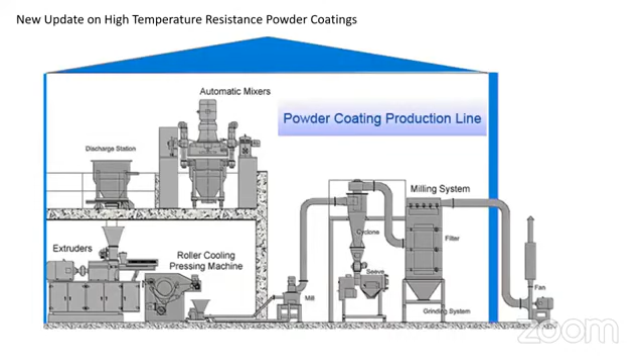Thanks, let me take you through my presentation. Are you able to see my screen? Needless to explain how powder coating is manufactured, because I thought some applicators are likely to join, so that's why I just put this chart. This is how powder coating is manufactured. We make appropriate formulations and mix it in the mixer, then transfer this product into a machine called an extruder, where powder is compounded at a semi-melting stage. Then it passes through a chilling roller, then we make it into small flakes, then we mill it to the appropriate particle size. So if you ask me, only 50% of the whole powder coating process is completed at the manufacturer level.

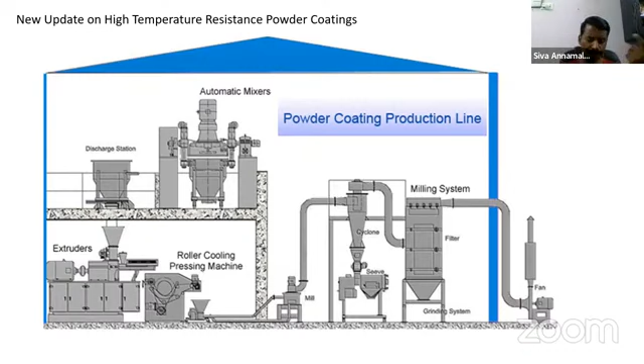So we supply only powder to customers. Then the remaining 50% of the process, like melting, curing, cross linking, happens at the customer line. So both are equally important. This is how powder coating is manufactured.

Now I am going to talk about one new topic which most of the people know, or maybe may not be knowing in depth - high temperature resistance powder coating. Some people call it HR powder, heat resistance powder. Some people call it high temperature resistance, that's called HT powder. Most of the HT requirements are based on silicone resins. For example, powder coating is established well in mufflers, silencers, some barbecue equipment, even in some utensils which are directly exposed to high heat. Some automotive parts, some ACE segments - ACE meaning agricultural construction equipment like tractors, JCB kind of machines.

Some products are where this heat resistance powder coating is in high demand. Most of us know that these heat resistant powders are produced with the help of silicone resins. But the thing is, silicone resins are of two types: phenyl type and methyl type.

Based on their chemical nature, you can get temperature resistance of maybe 400, 500, or 600 degrees Celsius. This is up to this, most of us know about it. But the second part is that the cost of these resins is very expensive, a minimum of 1,500 to 2,000 rupees per kg.

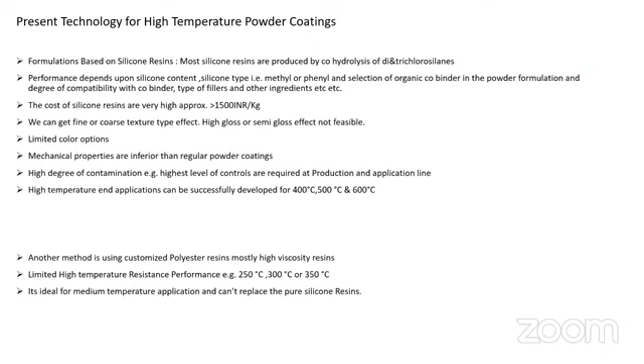And fourth, limited color options. You cannot achieve whatever kind of metallic effects or finishes you want. Also, your high temperature performance depends not only on the silicone resin, but also on the type of filler you incorporate, and the type of special effect pigments you incorporate. So it's a combination of all these factors that gives you a final powder.

So only powder alone cannot give you corrosion protection. You must have aluminum metallizing. This is the current technology.

Next, some people take the silicone resin. There are two types of silicone resins available, as I told you: one is methyl type, another is phenyl type. One type is compatible with other organic co-binders like epoxy or polyester, meaning you can blend your polyester system with silicone resin.

You can get some intermediate kind of performance, so that you can improve your mechanical properties. This is one option. Whereas the other type is not compatible with any other organic co-binder, meaning in that formula you cannot add epoxy, polyester, or any curing agents. But your heat resistant performance would be excellent, while your mechanical property and all other remaining properties are highly subjective.

So some customers, what they do is use polyester. They don't want this powder for barbecue equipment or for silencers. So what they do is choose a purely polyester resin that has high viscosity. There are customized polyester resins available with viscosity of 10,000, and even up to 20,000.

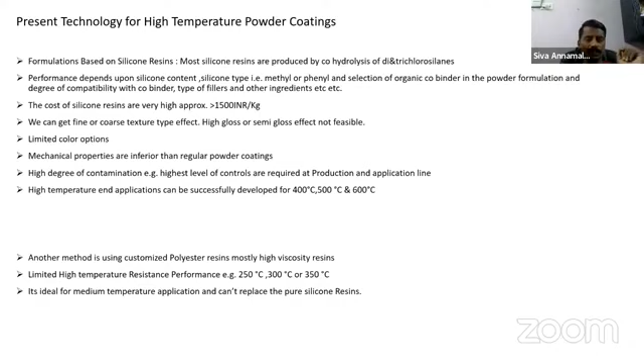This is called silicone modified polyester. So it is not purely polyester, and it is not purely a silicone resin. It is called silicone modified polyester. When you synthesize polyester, when you manufacture polyester, specially customized silicone monomers are infused at the time of manufacturing, in the polyester chain. It is not like a physical blend of two resins - it is basically special silicone monomers infused in polyester resins.

The approximate ratio could vary from 35 to 50%. It means finally you get a polyester, but that polyester consists of silicone monomers to the tune of 35 to 50%. What is the advantage?

You can get even high gloss finish, above 80 gloss. High gloss finishes are possible - this is not possible in conventional silicone resins. Second, you can get semi-glossy formulations - 50 gloss, 60 gloss, 70 gloss possible. Third, the cost is approximately 40 to 50% lower than your existing silicone resins. Existing silicone resin, if you import small quantity, may cost you 2,000 rupees per kilo. So the cost of this product is comparatively lower, 40 to 50% compared to pure silicone resins.

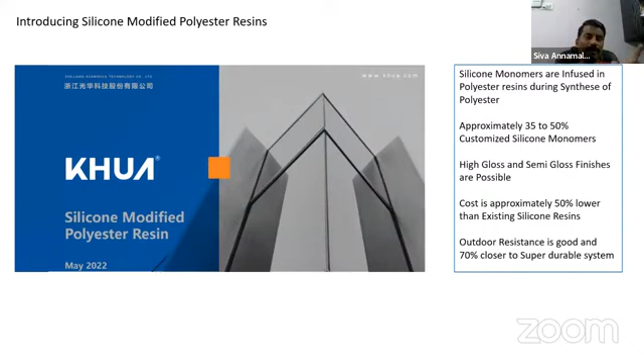And most important, this can be used for outdoor applications. With normal silicone resin, nobody will look at the weathering property because the shade itself is like a dead matte kind of texture product. Whereas this one can give outdoor performance very close to super durable. I am not saying it is as good as super durable - it's better than standard PE but very close to super durable. So 70% of super durable performance you can get with this polyester. Very few people have developed this. This product is called SMP, silicone modified polyester resin.

So what is special? This is basically the brand what I am representing - it's not about the brand, you can choose any brand as you wish. The brand we work with has the grade called GH9000. This is basically a hydroxylated resin, which means the curing agent would be IPDI, isophorone diisocyanate.

As I mentioned, silicone resin has no pure curing agent that can react with it, because your heat resistant performance comes purely from the reaction between silicone and oxygen bond - the Si-O bond. Si means silicone, O means oxygen. If the bonding between Si and O is very strong, your heat resistant performance is very strong. Somewhere it is Si-OH, so that's why we use IPDI as a curing agent. The polyester is basically PU type polyester, hydroxylated polyester, but infused with silicone monomers. The grade name is GH9000.

So we picked up this resin. We developed it last year, but commercialized it last May, in technical collaboration with one European company. So this product we compared with the existing high viscous polyester resin currently used in the industry for high temperature performance, to the tune of 300 degrees Celsius. So GH9000 is basically silicone modified polyester.

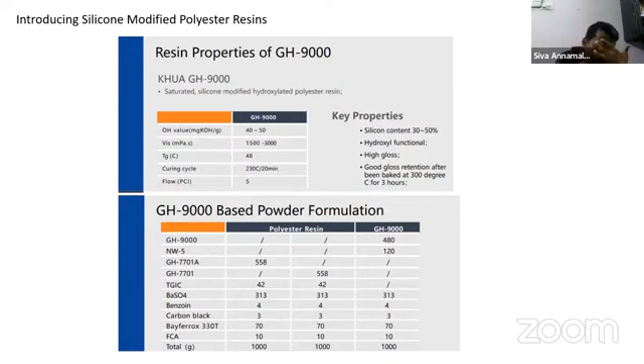This is the performance we tested at 300 degrees Celsius, for both grades. We never take silicone resin for comparisons - we take only the polyester resin for comparison, because silicone and polyester are different chemistry, so we do not include silicone in the comparison.

We expose the normal polyester, which has viscosity about 10,000 to 20,000. The gloss retention is very poor, whereas the silicone modified polyester resin shows extremely good gloss retention even after 3 hours of exposure at 300 degrees Celsius.

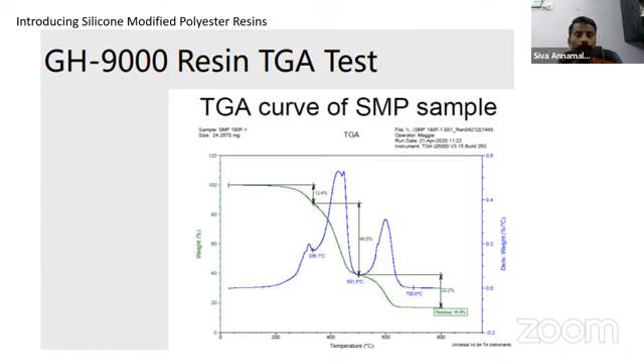Now we compare how the regular polyester system behaves - that is the high viscous polyester. If you see its green line, from 200 degrees it straight away comes down. It means at 300, 400 degrees, it's completely decomposed, and all the products are fully decomposed, with the residue coming around 42%.

This indicates the performance of silicone modified polyester is extremely good compared to your conventional polyester system. So this can even replace silicone resin in selective applications.

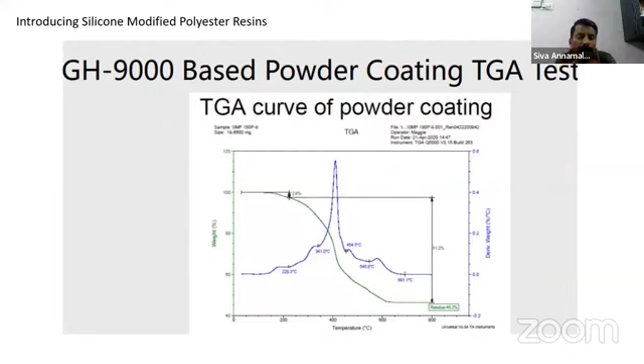So what we do is, if your sample performs well at 300 degrees even for 3 hours, then we check it at 350 degrees Celsius. At 350 degrees, even after 2 hours of continuous exposure, the formulation and resin performance would be excellent. This is about my first topic on silicone modified polyester, which is new to the industry.

Now if you compare the heat resistance, let's look at the second column. The initial gloss for this one is 88, whereas the regular high viscous polyester has an initial gloss of 94.7.

If you expose it to 300 degrees for just 1 hour, the gloss goes down - some products go to 67, some straight away drop to 10 gloss. After 2 hours, the coating is completely decomposed, and after 3 hours, the gloss goes down to 3.

Whereas here, the gloss from 88.8 comes down only gradually - the percentage of gloss retention is above 90% even after 3 hours of continuous exposure, in a glossy finish. What is most important is that it is a glossy finish, not like a silicone resin textured finish. Even in a glossy finish, you get excellent gloss retention after longer exposure.

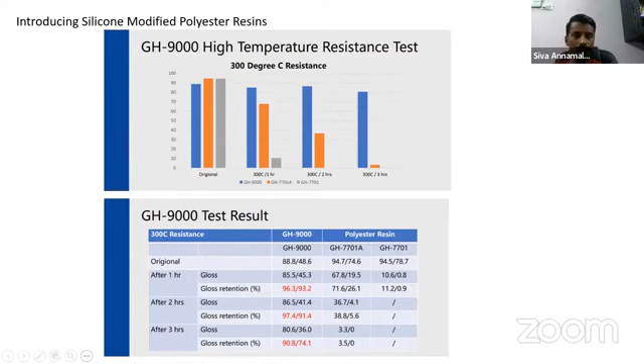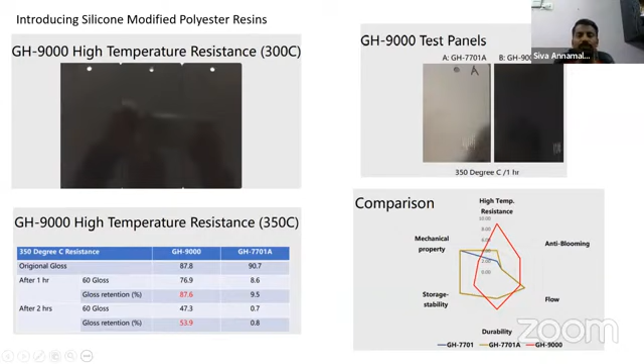So this is basically one new product which I would like to update, and I think only 2 companies have this product, you can check it out. We have it, and one more company is also having a similar product. Of course I can share all the details separately. If you want the presentations, I will share with you separately. So this is about silicone modified polyester, one new product.

Second one, I'll take you through the metallic powder coatings. Everyone knows this, sorry to interrupt.

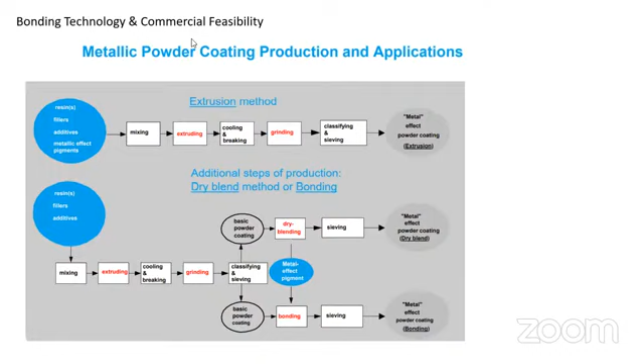Can you hear my voice, Kuldeep sir? Yes sir, it's audible, you may please start with your presentation. Yeah, it's clear, sure, fine.

So second one is metallic powder coating. We all know how powder coating is manufactured. Once we manufacture powder, to get metallic effect, there are three methods currently available. One is the extrusion grade product. It means you make powder coating, premixing, extrusion, milling. During premixing you add certain metallic pigments into the premixer, then you extrude it, then you mill it, and you supply. This is called extrudable grade metallic powder coating.

What is the advantage? You need not add anything after completing your production, so your time is saved. Any color you want to fix, you can fix at the premix stage. But what is the negative aspect of this process? Actually your metallic effect or metallic brilliance, you get a dull effect. Your metallic or luster effect goes away when the metallic pigment is subjected to high shear in the extruders. So this is a disadvantage.

The second one is called dry blending method. It means you produce powder separately and mix metallic pigment, preferably aluminum, into a blender, and blend homogeneously, then supply. This is a good method, you will get very bright metallic effects, but the disadvantage is that the specific gravity, the density of metallic pigments, is much higher than the density of powder coating, almost 2 to 3 times.

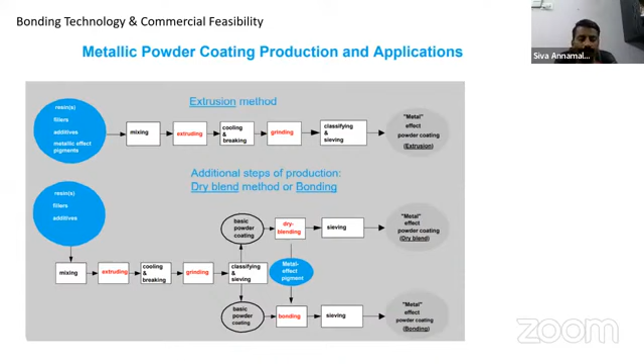So this is the spraying process. When your powder is traveling along with your air, if it travels uniformly, then you will get a uniform finish. But there are three forces acting on each powder particle. One is gravity force - if the powder is heavy, it has more weight and will fall down. Second is electric force. Third is the aerodynamic force. Fine particles will be collected in your cyclone. So we all know this.

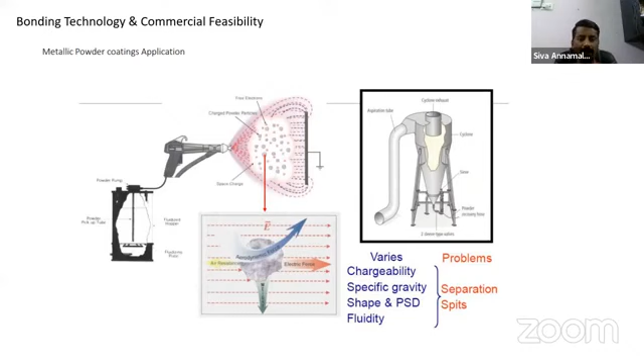But if you take a dry blended product and spray it, your recovery powder and your virgin powder may not have the same color. So we face a lot of challenges in the application line whenever metallic pigments are used. So this is basically the difference between dry blending and bonding.

Before going into more detail about bonding, let me recap the three methods. Extrusion method: the metallic effect goes away if aluminum pigment is extruded, because due to high shear in the extruder, metallic brilliance goes away. Second, there's a high possibility of explosion when you mill the powder, since if too much metal pigment is added to the hammer mill, there are good chances of explosion.

In dry blend, excellent metallic effect is possible, but you cannot add more dosage of metallic pigment. That's number one. Second, metallic separation - powder and metallic separation is obvious.

So bonding means, as I told you, physically the pigments and aluminum pigments and base powders are physically attached. But in bonding, there are things most of us may not know. So I'm going to give a few minutes of information about points most of us may not be aware of.

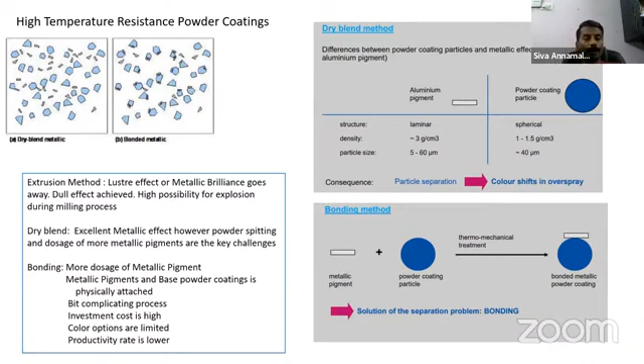Fifth one, as I told you, productivity. Productivity rate is very, very slow compared to your conventional dry blending method. For example, this is a method.

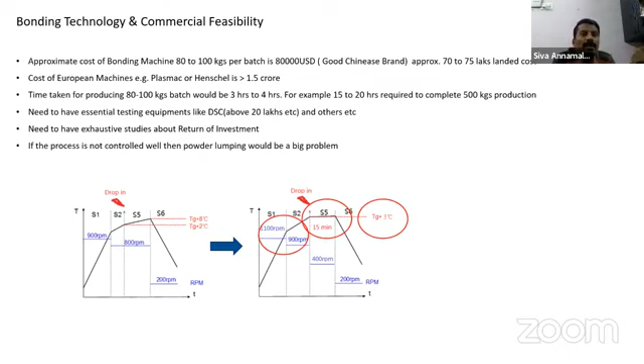It's one of the good methods, but looking at the cost and the process, you need to think twice whether you really need to invest or not. So this is an input because I repeatedly get so many calls asking, shall I go ahead for bonding?

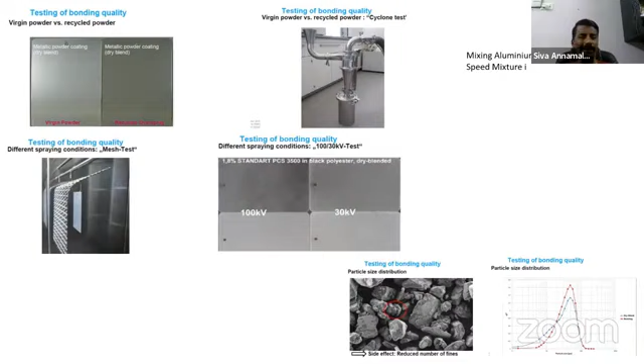The third one we all know is hydroxyl alkylamide. We simply call it primide. Primide means everyone knows, but unfortunately in India most people are not happy with primide-based formulations, or they are not successfully able to develop a product. So there are many complaints. Before going into those complaints and how to solve them, what are the formulation solutions?

I want to give first a comparison. There are only two key curing agents for polyester finish. One is TGIC, another one is called hydroxyl alkylamide, commercial name primide. Primide is the brand of EMS-Chemie, so the chemistry name is HAA, hydroxyl alkylamide. These two are the most commonly used curing agents in the powder coating industry. Other than that, polyurethane hardener is there, PT910 equivalent hardener, Powderlink equivalent hardener, but the consumption or usage is very, very limited, so we ignore it.

So let's compare TGIC and HAA. What is the good one? TGIC is the established curing agent in the industry, but it is carcinogenic. It is classified as a CMR substance. You must label it when you want to export the powder coating to any European country, even to the US. Labeling is must, it means skull and bone label must be there. Second, the cost of TGIC is always much higher, to the point maybe sometimes 3 times higher than your existing primide formulations. That is the second one.

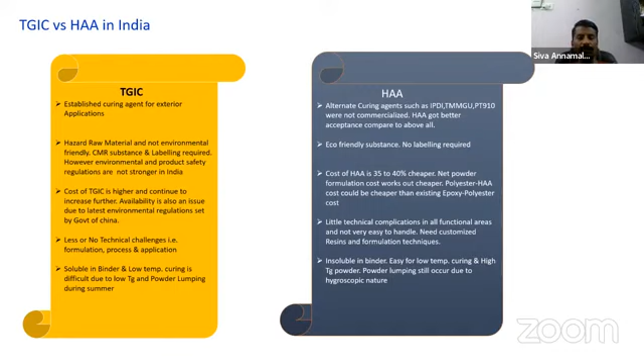But if you look at the consumption in India, it is quite low. I visited many European countries and sites. The consumption of primide is very popular and efficient in European countries, but in India it is not so. That's why I'm taking this opportunity to tell you what is different in HAA and how we can overcome it. The cost of TGIC-free, that is HAA-based formulations, are almost 20% cheaper - the cost of HAA is approximately 35 to 40% cheaper than TGIC. But with HAA, we face certain problems, and that's what we are going to talk about.

Before talking about hydroxyl alkylamide, that is primide, we need to know the history of this product. This product was developed in 1980 by Rohm and Haas. They are the original developers of this product in 1980. Later, this company was taken over by EMS-Chemie - they sold the technology to EMS-Chemie. They modified the product and introduced it as XL552. That is the basic version, and even today most of us are using it. Then the next version is called QM1260.

This is slightly a different version of HAA, but the cost is 2 times higher than TGIC, 4 times higher than your existing primide. So the purpose goes away. If you do something and its cost becomes 2, 3, 4 times more, there's no point. Its consumption and market demand opportunities become quite limited.

Then they developed another grade, SF4510, because they found basic versions had a lot of problems - overbaking resistance, yellowing resistance issues, powder lumping, honeycomb effect. The powder falls excessively, and wherever it falls, it creates a honeycomb type effect, a bumpy appearance. These are all issues, so they developed multiple versions.

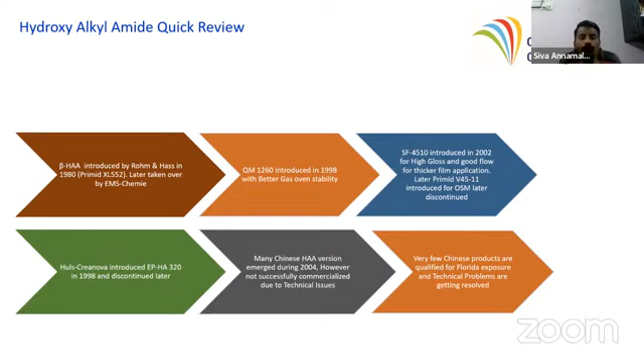So this is the history of HAA. But we must know what is the plus point of HAA and what is the minus point. The plus point is fine, but how can we overcome the minus point? The plus point is: cost-wise it's cheaper, good quality but cheaper, weathering resistance as good as TGIC.

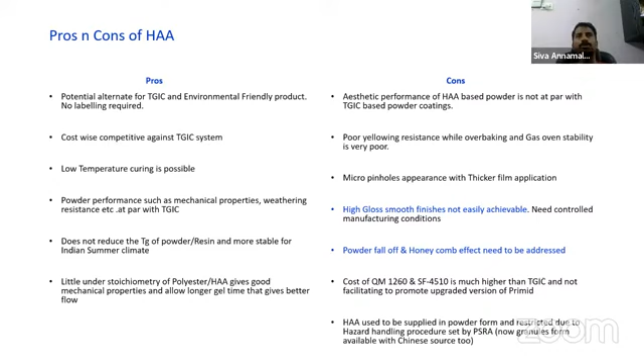So this is what I'm going to explain. Just a minute, I have a glass of water. Please have it, sir. Please have it.

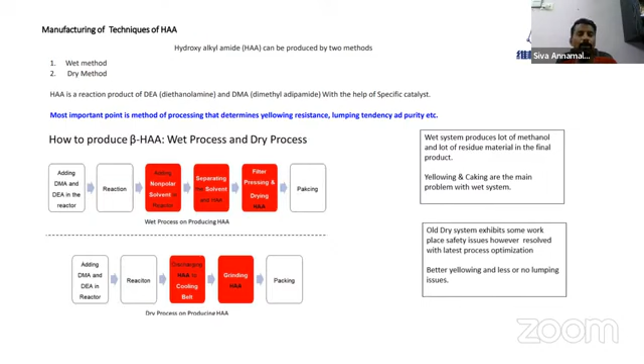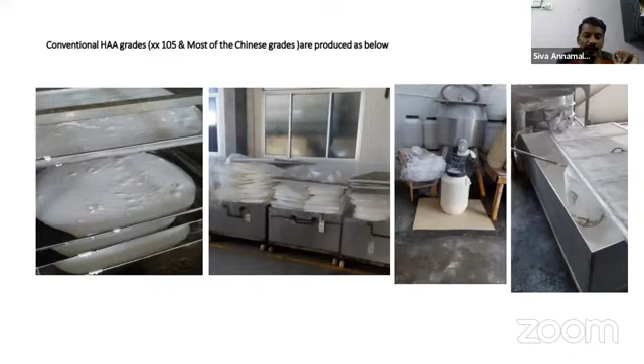Whereas the next one is an enhanced wet method. Still it is a wet method. What they do in enhanced wet method is, once the material comes from the reactor, it is collected via another reactor where complete vaporization and evaporation is done. So it is transferred to another evaporation tank, and finally it is milled. This is something like a better method, but it's still a wet method. Meaning, compared to conventional HAA, this HAA is much better, and the dry method HAA is even better than that.

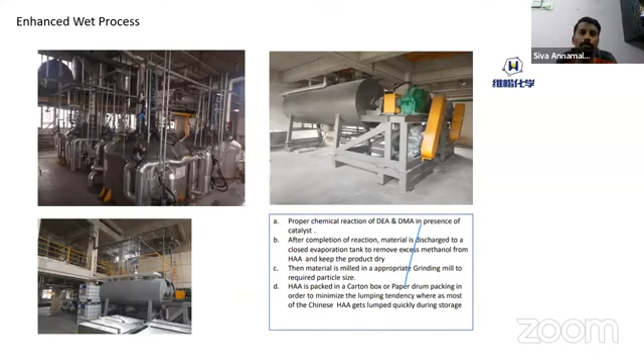This is how most of the HAA we use are produced. This is an enhanced method, optimized method, and the best method is taking the HAA directly from the reactor to the cooling belt, like a flaker. That is the best one because we can avoid yellowing and other issues.

I put in some commercially available HAA. I mentioned earlier there are two methods of manufacturing Primid, but there are also two qualities, two chemistries of Primid. What we currently use is called hydroxyethyl adipamide, 2-hydroxyethyl adipamide, whatever name you call it, XL552, whatever it is - it's 2-hydroxyethyl adipamide. Whereas the other grade, QM1260, which seems to be the best one, is called 2-hydroxypropyl adipamide. So what is the difference?

The first one is the general method, mostly wet method, but overbake resistance is slightly inferior. Whereas in the second one, they added some specific antioxidants, and that's why it gives better results in gas oven performance. With the first one, if you apply more than 100-150 micron thickness, micro-pinholes are visible. Whereas with this method, they incorporate certain specific additives that help you get pinhole-free coating. In terms of cost, this Primid is costlier than TGIC, so we can look at reducing that.

So if you ask me, is there any way to overcome this problem? Of course, we have some solutions. First of all, you choose the Primid that is produced through dry method or enhanced wet method. Unless you have this Primid, you will have more problems because your formulation contains more methanol that will come out. Sometimes you may get a toxic smell, easy lumping problem. So you should select Primid based on dry method, number one.

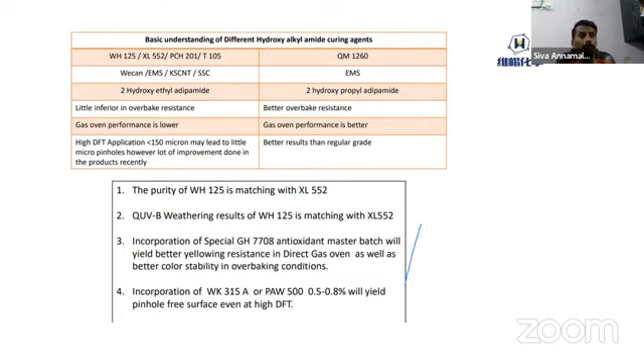I know most Chinese people are using these methods because I'm in close contact with them. I keep traveling, I keep meeting suppliers as well as some customers who are basically doing things which we are not doing. For example, in India, MDF board powder coating doesn't happen till today, but in Vietnam it happens quite a lot. So I got a chance - I thought why don't we share the information so our people can also benefit from it.

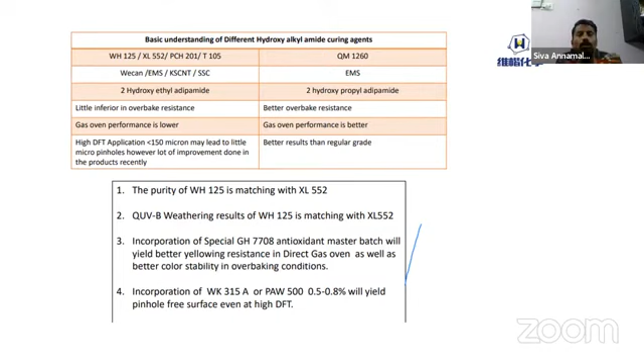So if you want to make a pre-mixed formulation in a good way, you must keep 2-3 points in mind. You must choose the HAA hardener that must be produced, number one, by the dry method. So you have to choose, and naturally the cost is higher.